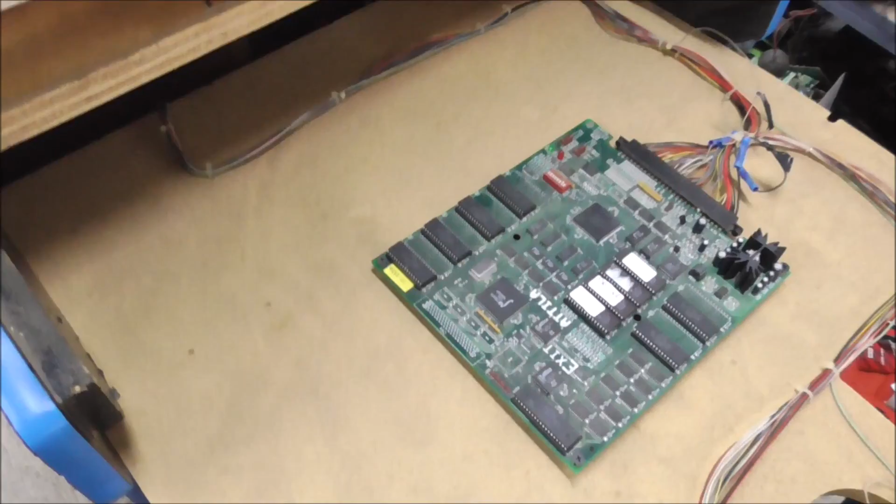We are working on a police trainer arcade game, which sells pretty well for us, and we've got a cabinet here that we're putting everything back together on.

We have the control panel all set up, but we need guns for it - the little Happ 45 light pistols. We did a video in the past where we were fixing a bunch of them, but I still have all these to go. In the other video we did a certain type that had 2 screws, but they made a newer type that had 3 screws at the bottom. So I'm going to try to fix a bunch of those today - pull a bunch of them out and work through them and see if we can get them going.

Okay, so while I'm messing with this, Joey is replacing the tube in the CRT because it's no bueno. I've got a whole box of these, and I'm going to do all the 3 screw ones while we have a game here we can mess with it and test it on.

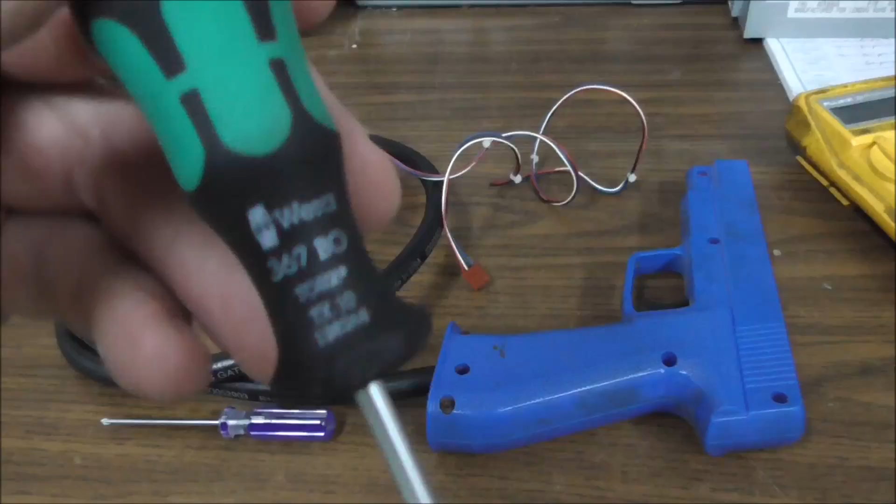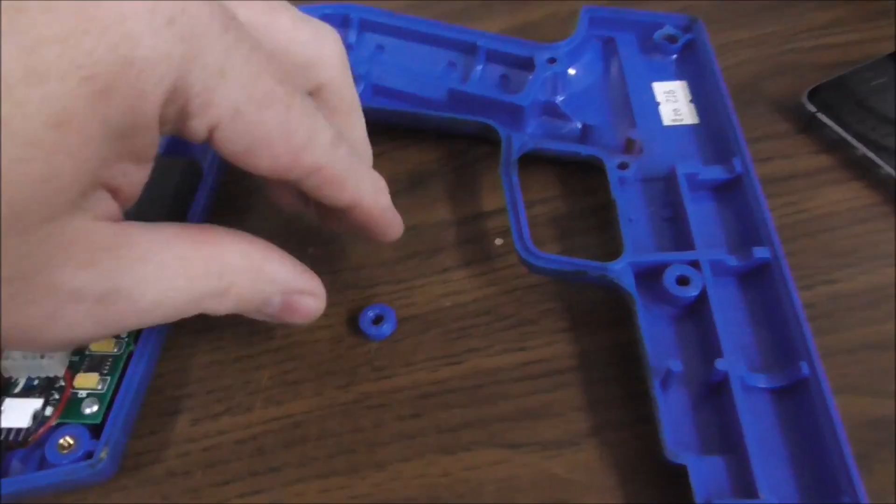Okay, so once we get this one open, one of the problems is this little piece is broken off here, which means you can't use the screw in there anymore. So you no longer have a secure part here, but you still have a screw there - those will hold the gun together. And up at the top you have a little chip, so when it's on the gun there's a chip, but it's in front of the lens, so it doesn't really matter - it's just cosmetic stuff. So I think that one's probably still savable, or at least usable. You can buy new gun halves - I think they're $30 or something for the set. Or if you don't mind the little chip, you can just leave it.

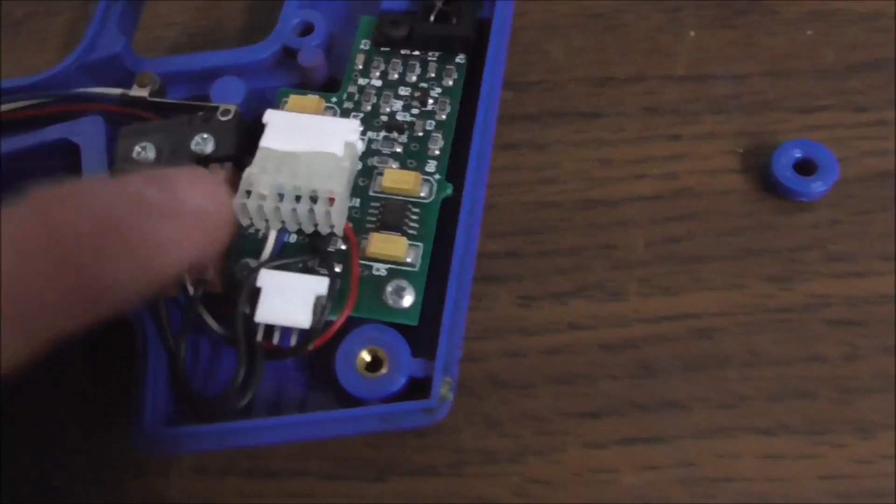So I don't see anything obvious on this one yet. Looks like the connector is still fully seated on there, so that's not going to be the problem, and it doesn't look like the wires are broke or anything. All of these are going to have the newer model gun board, which is a lot harder to fix because there's really not much that can go wrong on it, so it's hard to figure out why it would even be a problem. But it could be that the lens, one of the legs on the photo transistor broke or something - but probably not, because these newer ones had this little bracket. I'll take that board off and we'll look at it and see what we can find out.

Okay, so Joey got far enough on the police trainer that we can use it as a test bench, so we tested it, and we just cleaned up the inside and tested it, and it definitely doesn't work. So I'm going to try just replacing the optic and see if that fixes it.

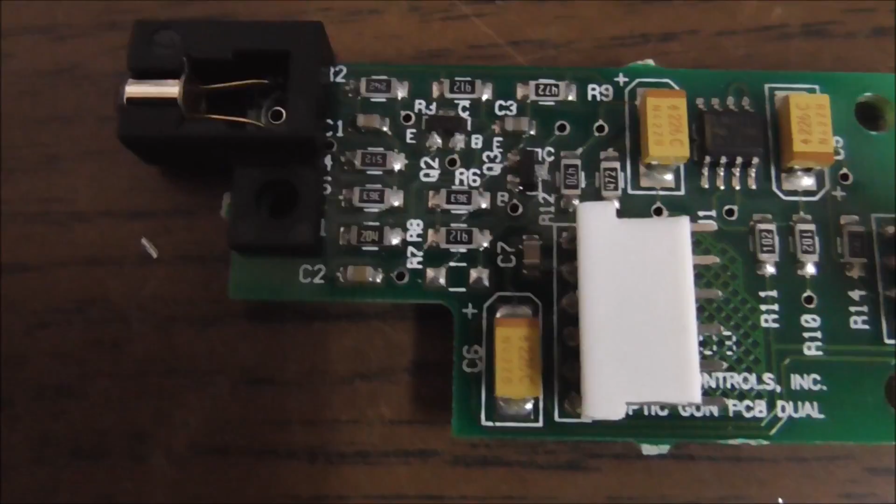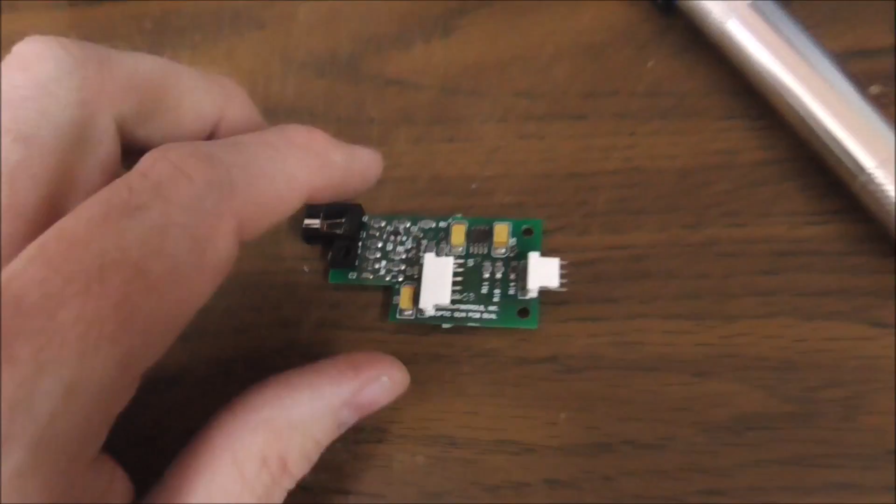Alright, so the optics are L14G1s. Took out the old one, put in the new one. These newer boards, everything's surface mounted, and there's not really that much to go bad, so I'm hoping that it's always the optic. There is a little chip - it's a LM311, I think - and then there's 2 little transistors, but they seem to test fine comparing it to other boards, which, by the way, I have a few other boards, not even the ones in the guns, just the extra ones I've had from over the years. So I'm trying to save $25 every time I fix one of these. So I've swapped the optics - that's all we did. We're going to put it right back in the gun and see if that fixed it.

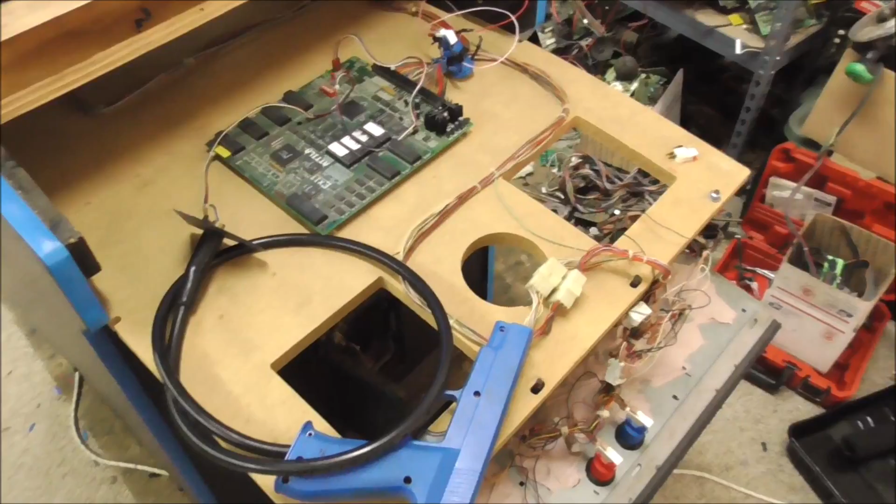Okay, so our monitor still definitely needs work, but it does appear that replacing the optic completely fixed it. Obviously we need to calibrate it. But board number 1 is fixed with the optics. You know what that means? Ka-ching! $25.

So this one, when plugged in, doesn't do anything. Even the trigger doesn't do anything, which is usually a good sign. It usually means the plug's unplugged on the board or a wire's broke. They're all filthy too, by the way, so they obviously need to be cleaned, but that's minor.

I'd rather have one dirty that does work than a clean one that doesn't work. So we'll fix them and then we'll clean them. But...

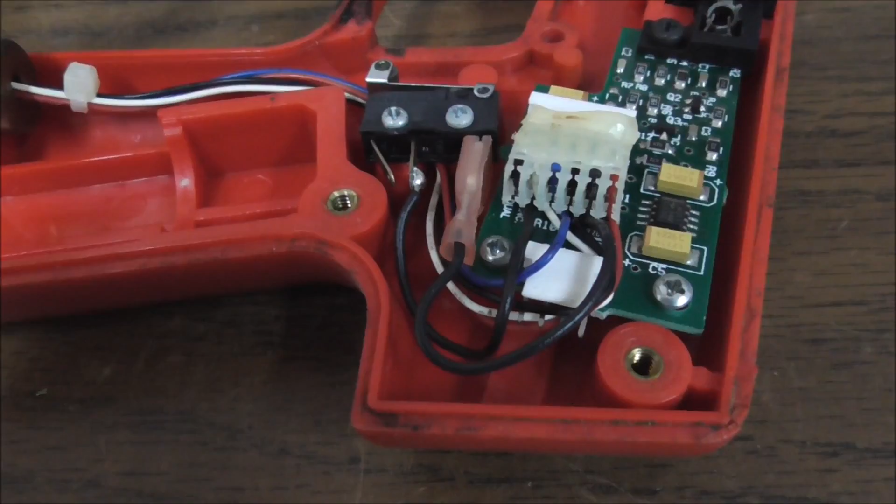I'll bet the plug's just unplugged on this one. Let's see. It appears to be slid apart just enough to make it not work. The ground comes up to this, and then it has to go into the board and come back out another pin to make the ground on this work.

So somebody's been in this one too. You see the solder, and it had a couple screws missing. But yeah, that's an easy one, if that's it. Sometimes the legs on these are broke too. Let's see.

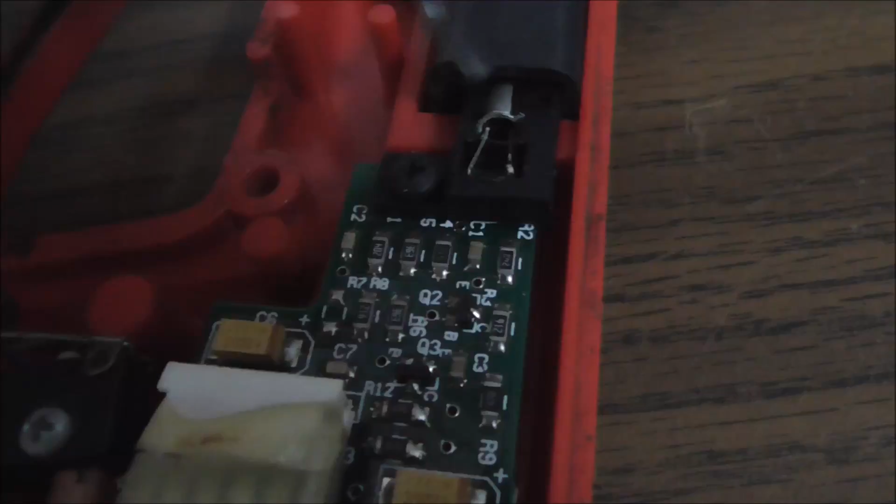Seems all right. Okay, so I'll clean up the lens and the front of the photo transistor, and we'll see if that fixed it.

All right, so that one was just unplugged. I can't aim while I'm holding the camera. All right, on to number 3.

Here's number 3. It has a little bit different look because it's only got 1 screw in the bottom instead of the 3. But I'm thinking it's probably the same, or like a copy of the design, and the cable's out of it, and somebody's taken some of the screws out and stuff. And the trigger's missing. So we'll take it apart and see what we got.

Okay, so we got multiple problems here. So the first thing that happened was the case broke a lot. See that hole? There's no way for a screw to hold it anymore. They're all supposed to look like that, but they've all broken.

This is Happ's recoil gun. That one's broken, and that one's broken. So you can see where there's extra room inside where you can fit the recoil coil, so the gun vibrates when you shoot it.

Bam, bam. Okay, so this side is all screwed up, but this side is still fine. It has the places for the screws still in it. So this side's fine, this side's all broke up.

So once that happened, it slid apart a little bit, and the trigger popped out because the spring was holding it in place.

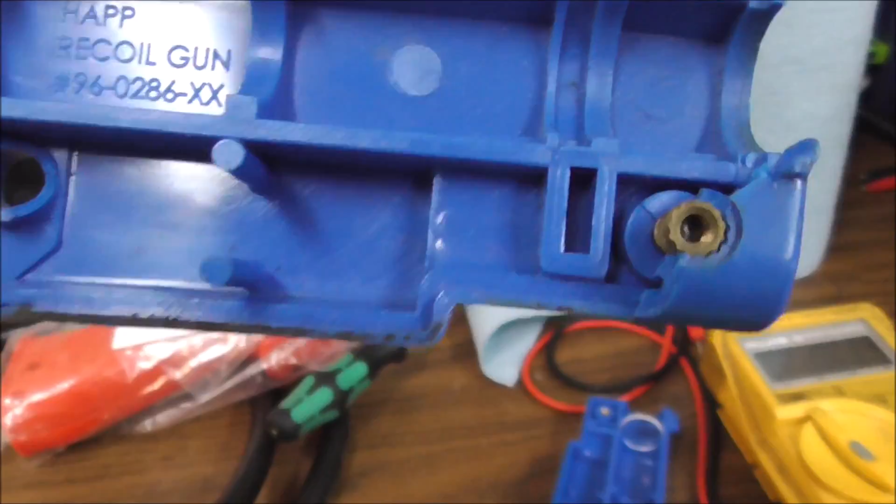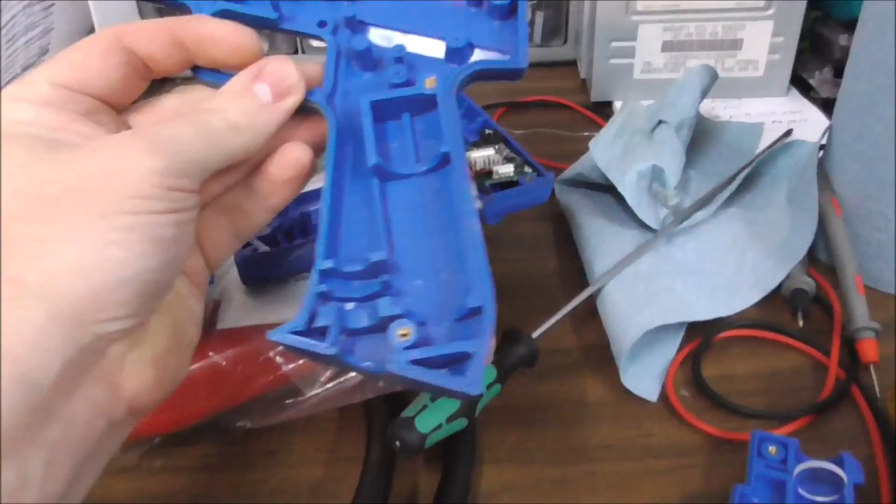This is a different case, and I also found a couple of the right sides here. Like, see, this is the exact same part - the right side survived, the left sides get all screwed up. So it looks like they were kind of in the middle of changing them.

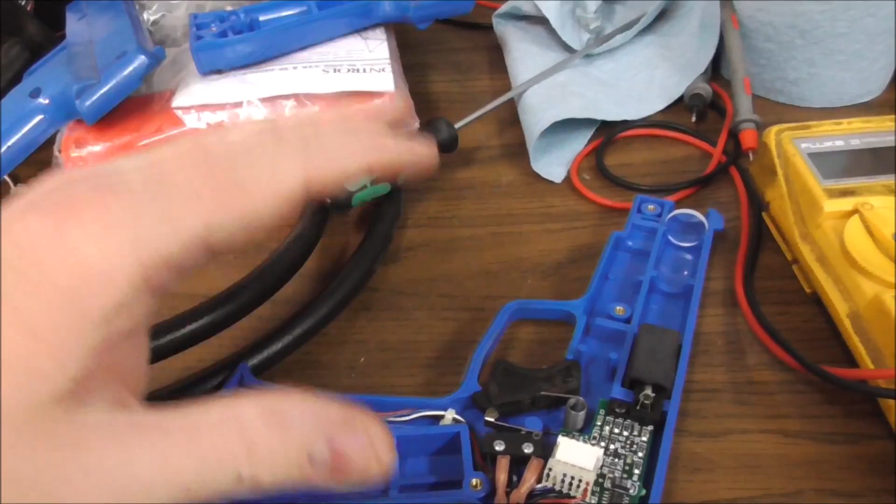So the Model 1s were more like this, where they had 2 screws down here, and they cracked a lot. So they redesigned it and put the screws in like where you don't need a nut on the back - it's actually in the plastic. So the screws tighten up, and they put 1 screw at the bottom.

They changed the way the cord is too. The cord's a little different on the other ones. Just little stuff - like the old one, the cord came up to here, and the new one it comes down to here. Little stuff like that probably changes the way the tension works whenever they get dropped or something pulls on them.

But then it looks like these ones were all problematic, and it caused all kinds of cracking problems. So they redesigned it again, and they made the one that has the 3 screws.

So because I can't find a left side for this, but I've got what looks to be all the working parts of one, I've got this empty case here that I bought somewhere. I think I'll just put this new one on there, and we'll test it, and we should have like a pretty much new gun.

I'll just take all the blue ones, and we'll be done with loose blue ones. I've still got some though that are complete that we can still work with, but I'll put that red case on it and let's test it out.

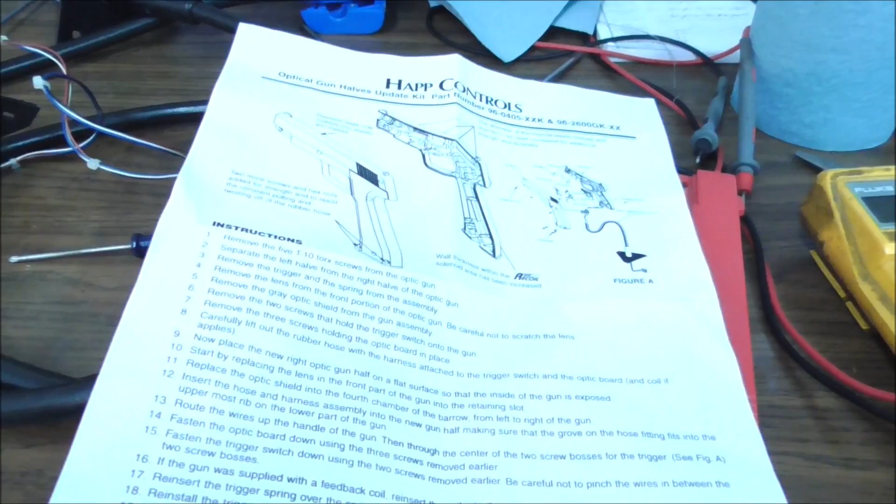Swapped the new case on it, and it came with a little document here that talks about what we were just talking about. Let's look at it.

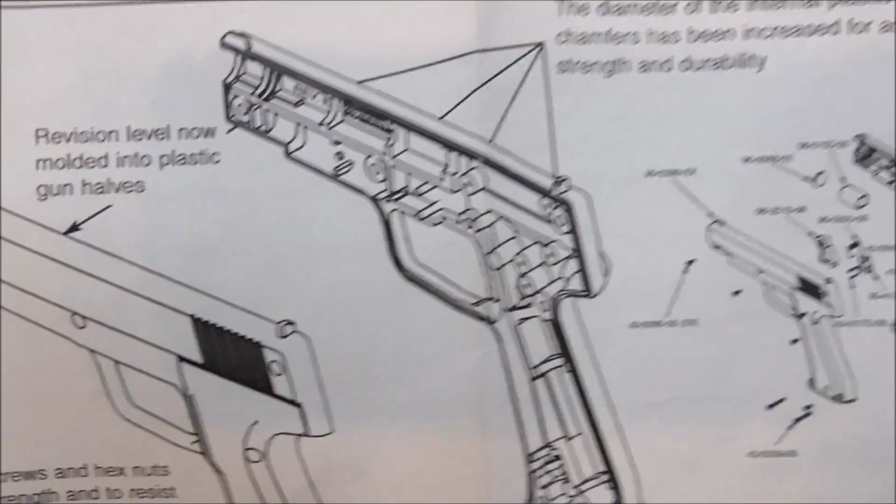Optical gun halves update kit. So it tells you what they changed, which is pretty cool. It says the diameter of the internal plastic bosses and chamfers has been increased for additional strength and durability.

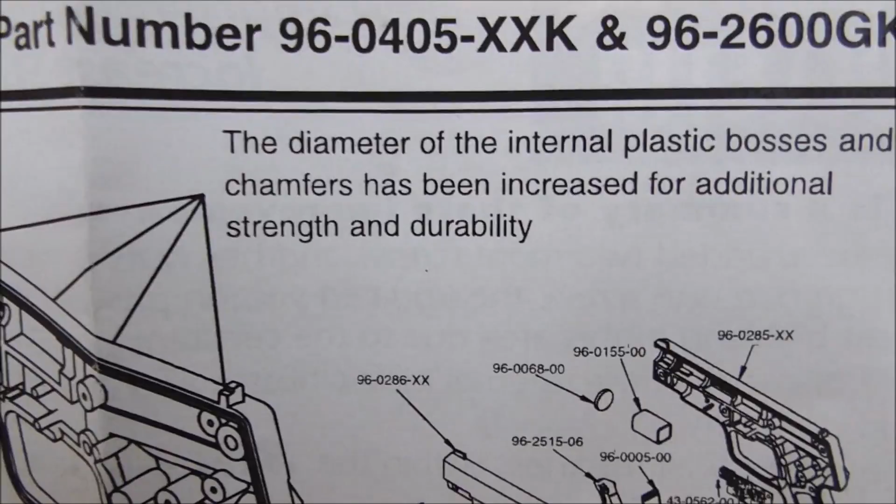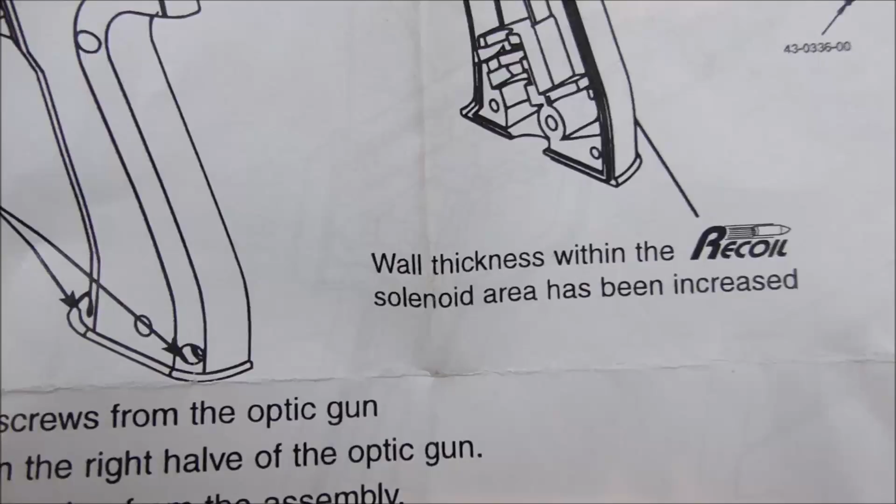So they must have known something's going on there. Wall thickness within the recoil solenoid area has been increased. Must have been a problem there, as parts break down.

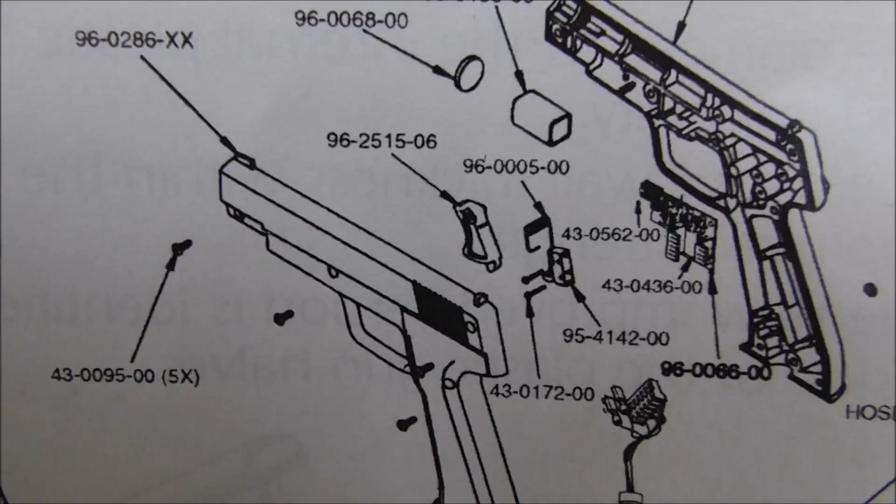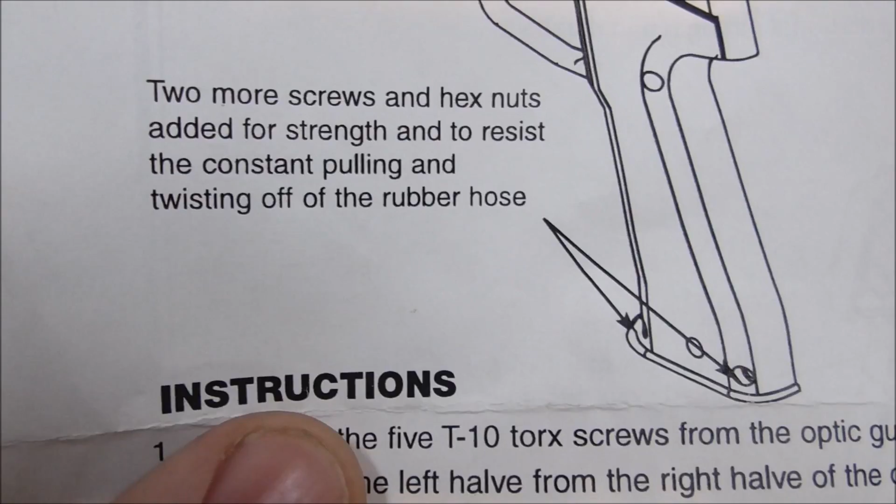It says 2 more screws and hex nuts added for strength and to resist the constant pulling and twisting off of the rubber hose. Revision level now molded into the plastic gun halves. So it says revision E right there.

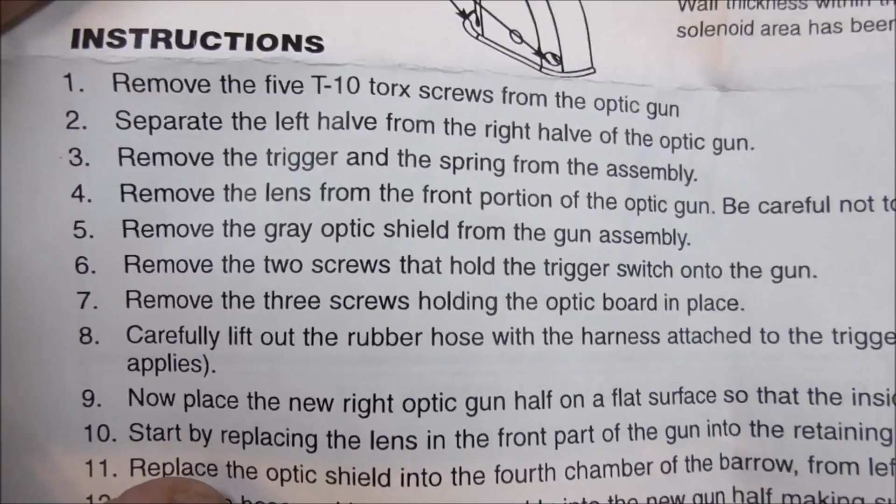Instructions: remove the 5 screws, separate the left half, remove the trigger and the spring, remove the lens from the front portion, be careful not to scratch the lens. Remove the gray optic shield from the gun assembly, remove the 2 screws that hold the trigger switch onto the gun, remove the 3 screws holding the optic board in place, carefully lift out the rubber hose with the harness attached to the trigger switch and the optic board and the recoil if it applies.

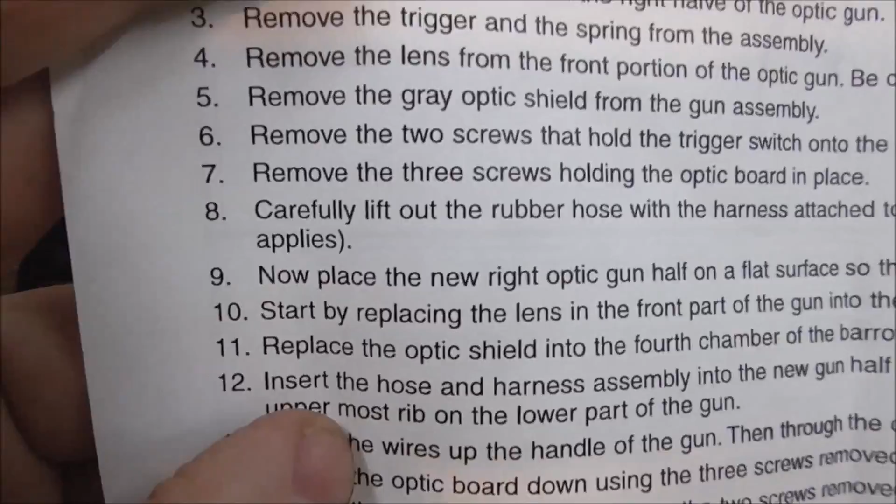Now place the new right optic gun half on a flat surface so the inside of the gun is exposed. Start by replacing the lens in the front part of the gun into the retaining slot. Replace the optic shield into the 4th chamber of the barrel from left to right of the gun.

Boy, that's a great word there. Barrow. I thought it was barrel. Barrow, I guess it's like wheelbarrow. It's a spot to hold something, I guess.

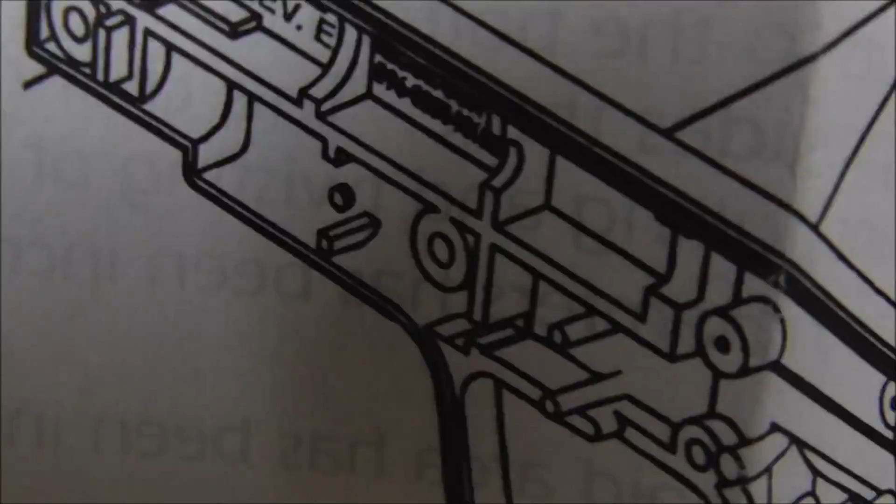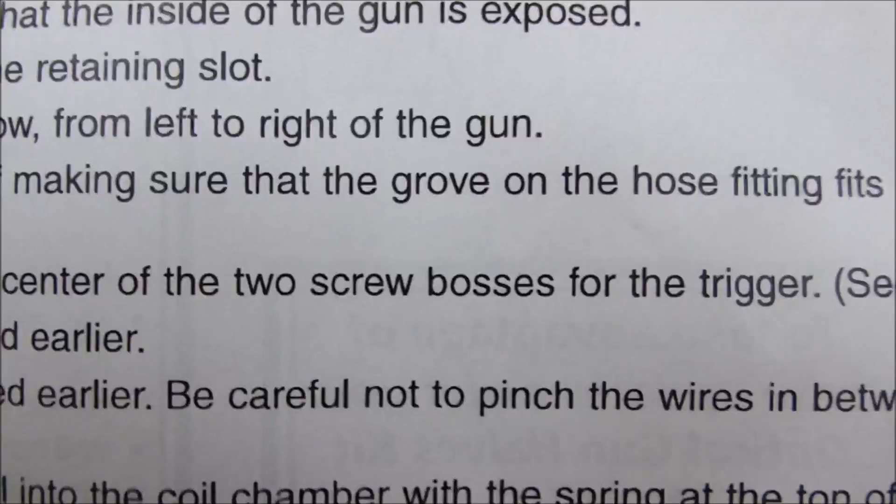Barrow, I like it. Insert the hose and harness assembly into the new gun half, making sure that the grove... Now there are some words that I don't know, but I'm not so sure. I'm thinking that's supposed to be groove. I mean, I know all about groove. I'm an expert on groove, but grove?

I think they might be wrong on that one. Which leads me to believe, are they wrong about barrow? The grove on the hose fitting fits into the uppermost rib on the lower part of the gun.

Route the wires up the handle of the gun, then through the center of the 2 screw bosses for the trigger. Fasten the optic board down using the 3 screws removed earlier. Fasten the trigger switch down using the 2 screws removed earlier. Be careful not to pinch the wires in between the 2 screw bosses.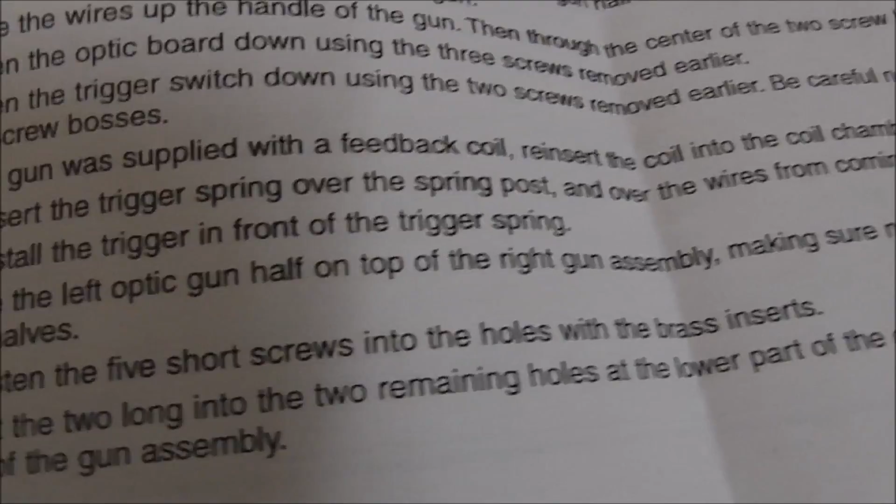If the gun was supplied with a feedback coil, reinsert the coil into the coil chamber with the spring at the top of the coil. Reinsert the trigger spring over the spring post and over the wires coming from the hose assembly.

Ain't no such thing as a damn barrow in this instance. Barrow's bullshit on this one. That meant barrel.

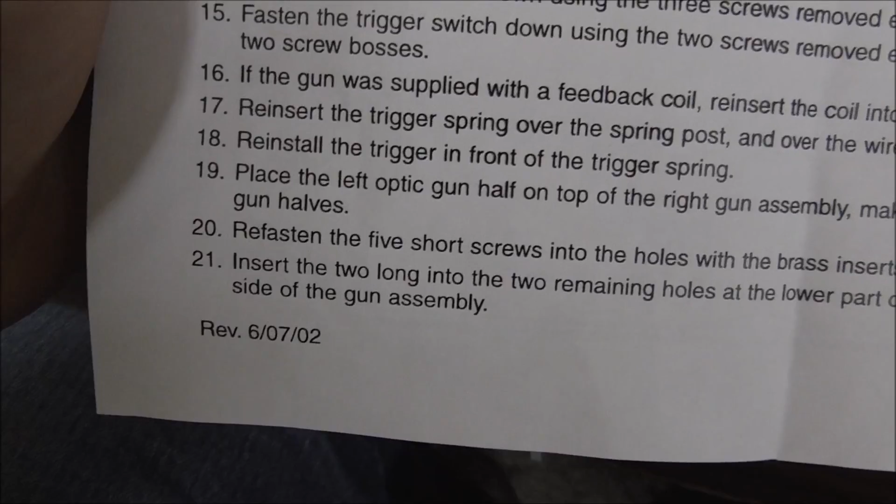Reinstall the trigger in front of the trigger spring. Place the left optic gun half on top of the right gun assembly, making sure not to pinch any wires in between the 2 gun halves. Refasten the 5 short screws into the holes with the brass inserts.

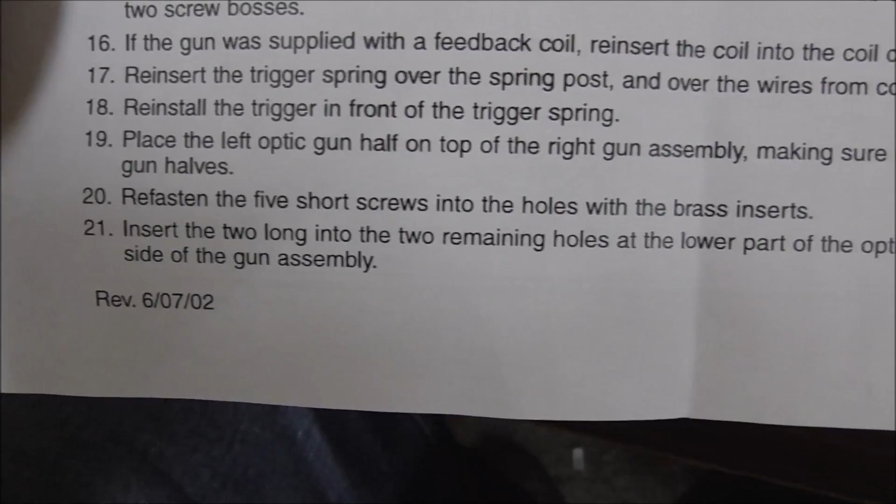Oh, and I thought of what the brass inserts must be called. Studs. I should have known that one. Insert the 2 long into the 2 long.

Definitely barrel. Insert the 2 long screws into the 2 remaining holes at the lower part of the optic gun, then fasten with 2 nuts on the opposite side of the gun assembly.

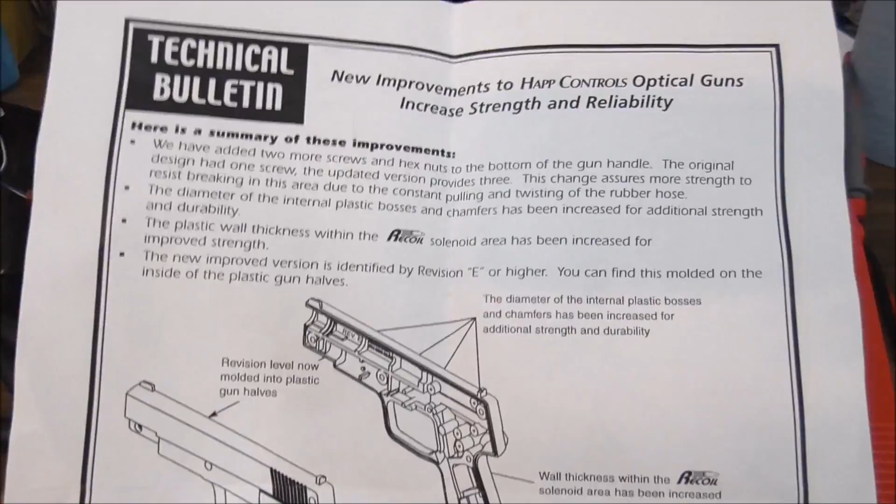Technical bulletin. Here is a summary of these improvements. We have added 2 more screws and hex nuts to the bottom of the gun handle. The original design had 1 screw, the updated version provides 3. Well, the original design had 2. They messed up, people. When they went from 2 to 1, it was a big no-no. They tried to save that screw and it bit them in the ass.

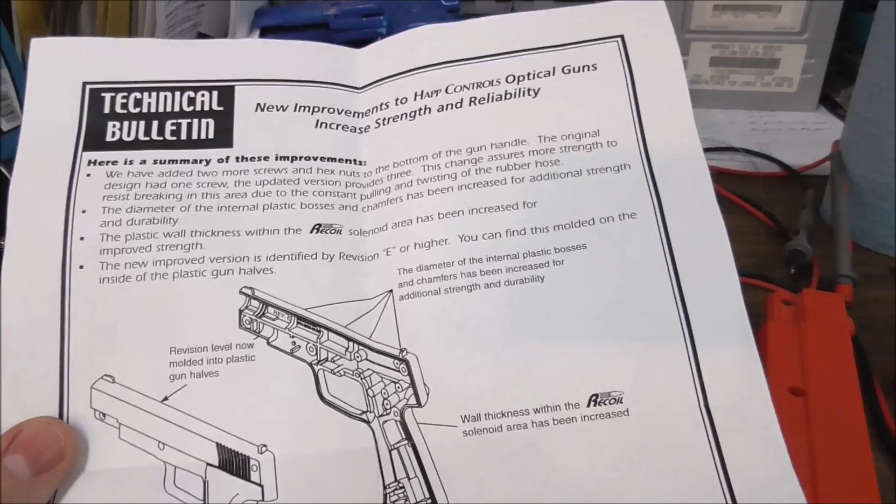The original design had 1 screw, the updated version provides 3. This change assures more strength to resist breaking in this area due to the constant pulling and twisting of the rubber hose, which was going on when there were only 2. They should have known.

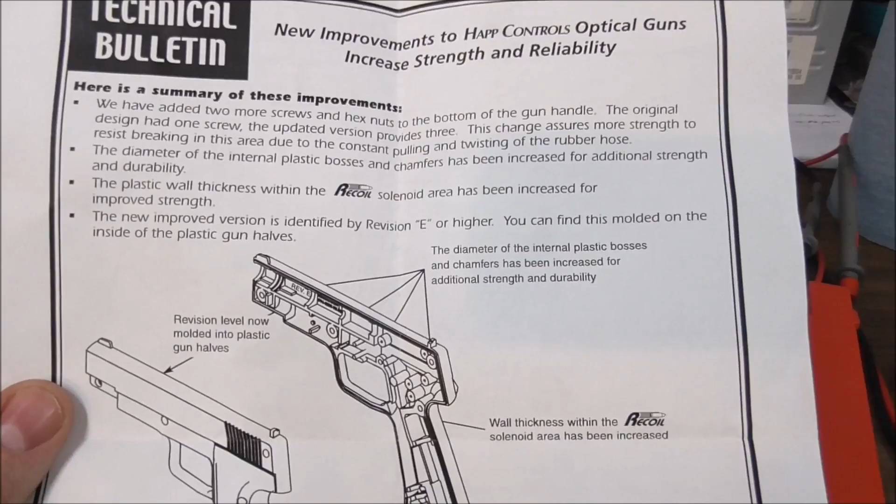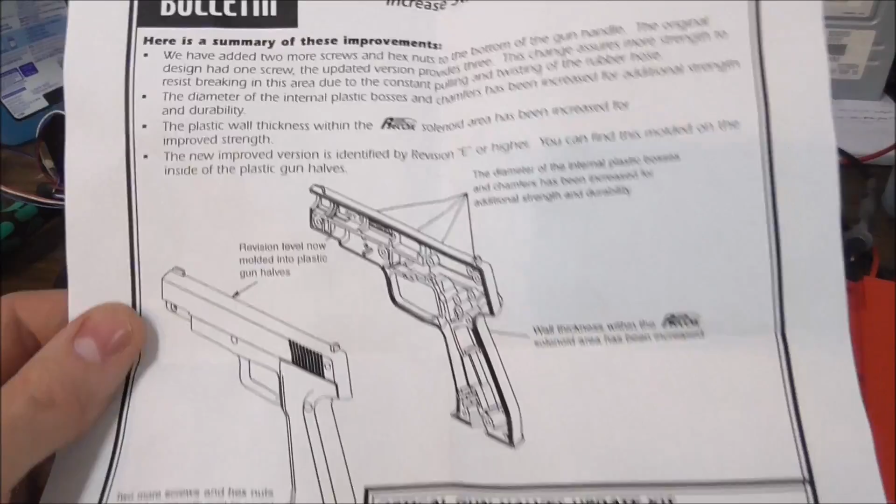The diameter of the internal plastic bosses and chamfers has been increased for additional strength and durability. The plastic wall thickness within the recoil solenoid area has been increased for improved strength. The new improved version is identified by revision E or higher, which you can find molded on the inside of the plastic gun halves. To take advantage of these updates, order your optical gun halves kits now.

And they were $27.90 in 2002. Well, they're about $25 now. I don't know how the price dropped, but it did.

Alright, so that's that. So I'm going to plug this one in and see if gun number 3 works. Yeah. You know what that means? I saved another $25. I'm going to go ahead and count it.

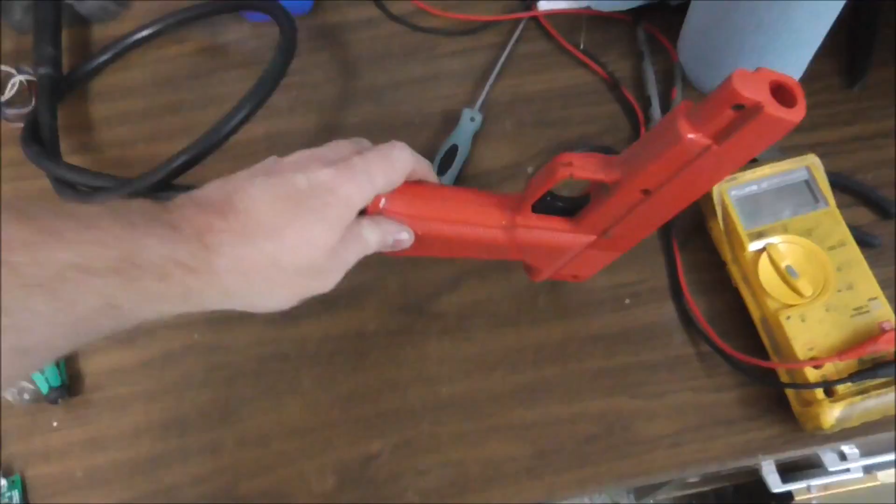Number 4 was in our broke box, but works just fine. So that definitely counts.

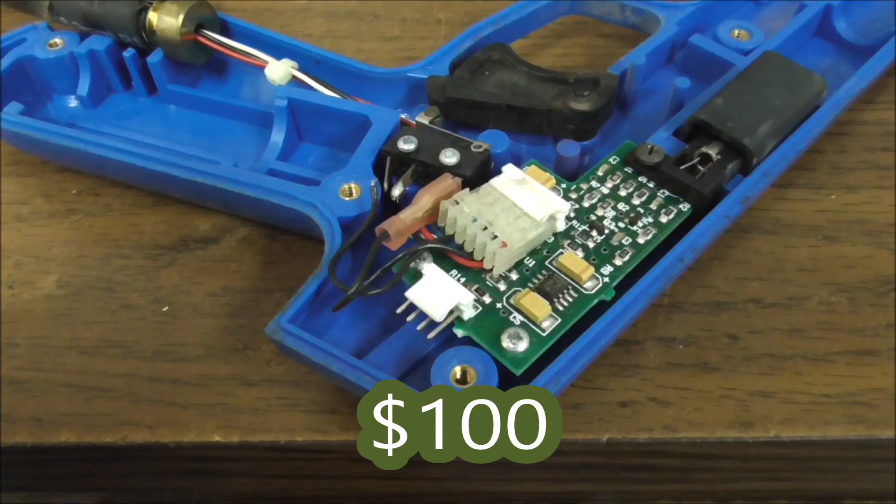Gun number 5 wasn't doing anything, so I thought it would be the plug. The plug is not messed up, but the trigger wire is broke off. So if you can't pull the trigger, you can't hit anything. I'm going to solder that back onto the pin. You could put a little connector, but I don't have any that are that small, actually. I'm going to solder it back on like they had it, do a little better job, hopefully, than they did, so it'll last longer. Hell, it may have lasted 10 years, I don't know. But solder it on really good, and then we'll try it.

I think this is 5, isn't it? Everything's cool. Very nice. Alright, on to the next one.

So those were the last of the Type 2s that I had that were in good condition. I've got a bunch that are cracked up and stuff that need new cases, so I figured I'd go through and fix some of the boards. Maybe I can fix or test the one in this one, and then use it to test some of these. Look at all these. Oh, we got to get some of them back together. I hate having them just sitting around that don't work.

Right? So I'm filming this video. I'm going to take this one apart, see what's going on with it, see if we can test it. And we'll just use this cracked up gun as our test bed for some of these other boards.

So the inside of this one looks fine. These are all sold to us as broken, tested not working. But it could just be that they threw this one in because the case is broken in half. So we'll test it out.

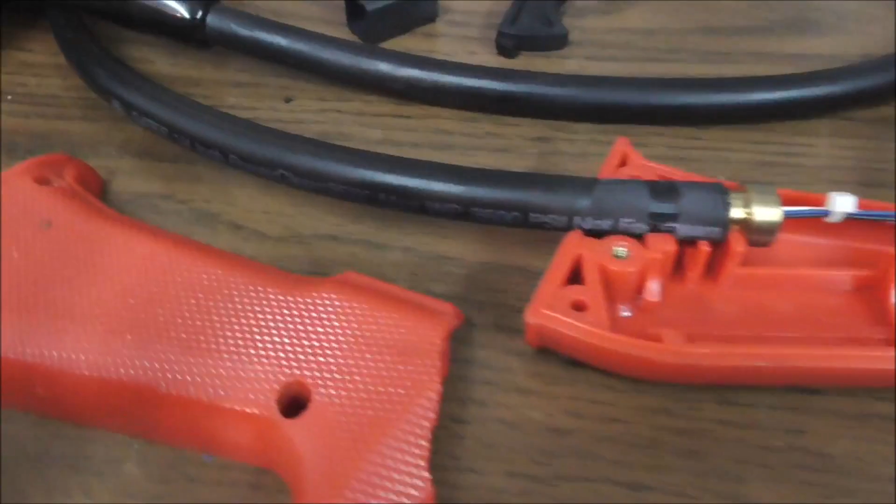Another thing I wanted to show you, just kind of interesting - the hose that they use on these is just an off-the-shelf part. Gates 1/4 inch, Power Clean 3500, Max WP 3500 PSI, but it's not for steam.

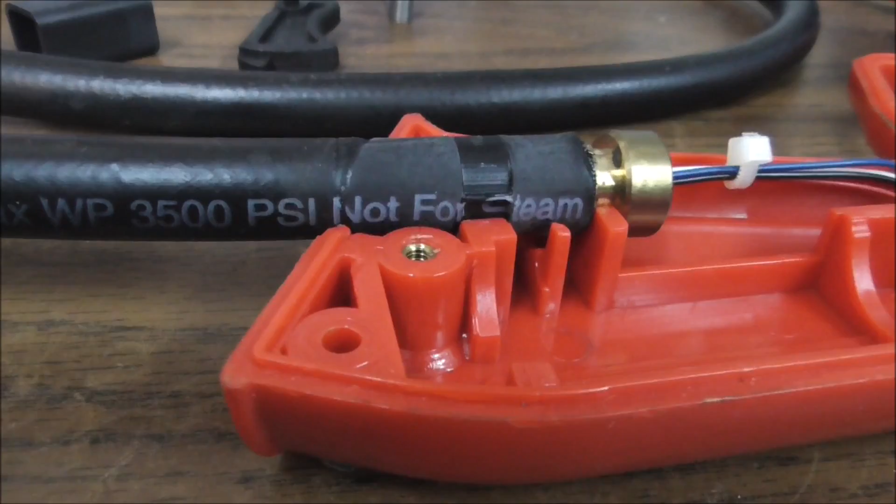I picked the wrong one, but you can see that the gun works. All right, so that's board number 6 that works. So we're doing good here.

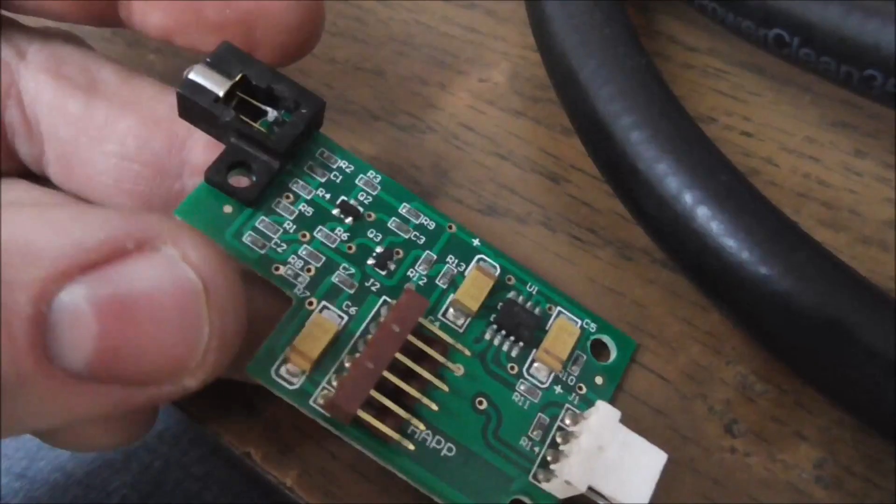So this is candidate 7. If you look really close, right where the leg goes into the body of the optic, you see how the optic's moving, but the leg isn't? So the leg broke off. I'm going to very carefully replace that optic with a new one, and that should fix that one.

Adjusted the monitor a little bit. This is number 7. Let's see what we got here.

All right, that's board number 7. We got that one off the counter, so that's good. It's been laying around for who knows how long.

That's the optic that was broke off number 7. As you can see, the leg broke off right flush with the thing, so there's really no way to fix it. But board number 8, if you look really close, it's broke right where it bends on the top one. But there's plenty of leg there, so I should be able to solder that back on. So I'm going to dab a little bit of solder on it, and then we'll see if that fixes it.

Look how beautiful. Look how gorgeous. I didn't even burn any of the plastic. Look at that. Wow. Man. Might have made $25 with just a little teeny dab of solder.

Holy moly, I just noticed, as I'm putting it back in, this is a parts board. Look, it's had everything taken off of it. The caps are missing, which we would replace, but that surface mount chip's gone, and I don't like messing with those. So I did fix the optic, but I think I'll take it off and try it on one of these other ones.

Like maybe this one. What do you think about that one? Let's try it on this one. Okay, this is the new board 8. Not like that other board 8.

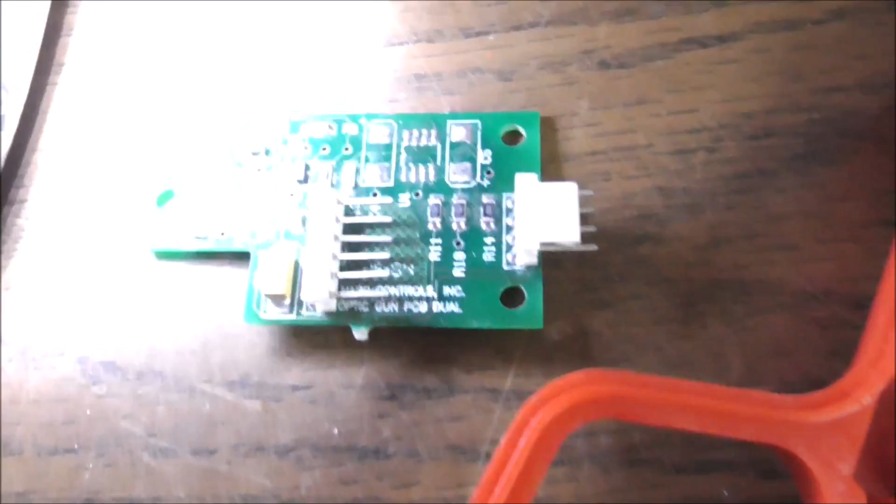Alright, so I tried this one and it didn't work, but now that I look at it, this is another one that someone has tried to part out. If you look, R11 is missing and C1 is missing, so I'm going to pull them off of that one that's largely been parted out, because both of them are still there, so we'll pop them on there and we'll try it again.

Okay, so I put the cap and the resistor that we're missing back on the board, and I got this one. All right, so that's 8.

Board 9 was just in the bag of broken ones, but it doesn't look like anything's wrong with it. And then board 10, same thing. So maybe they got mixed in. We're gonna test both of those out and see if there's anything wrong with them. Okay, so 9 and 10 worked fine.

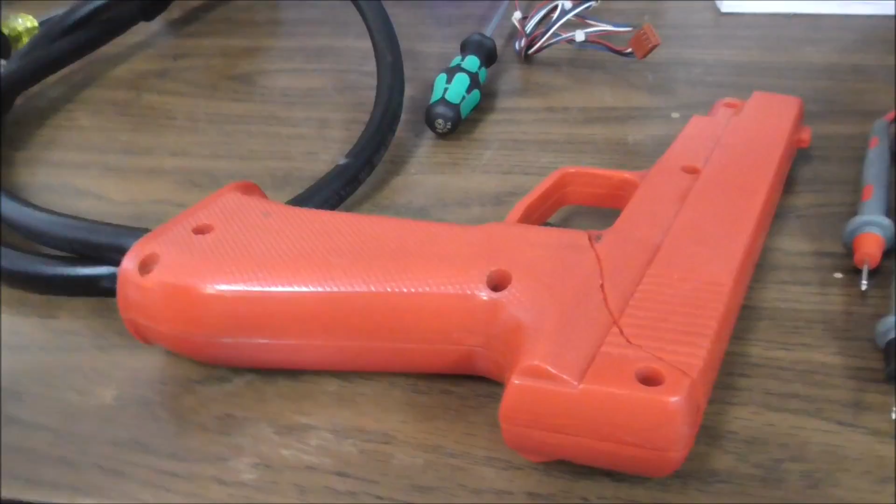Still needs to be calibrated. All right, folks, that's all of them that I had. Number 12 worked fine, so we tested 12 boards. Some of them just worked fine, and all of the ones that were messed up, all they really needed was the optic.

If it's the Type 2 board, it's vastly superior to the Type 1, I would say. But the Type 1s, depending on the casing you have, will still work good. So I got like a whole box of them now. This should last me like forever.

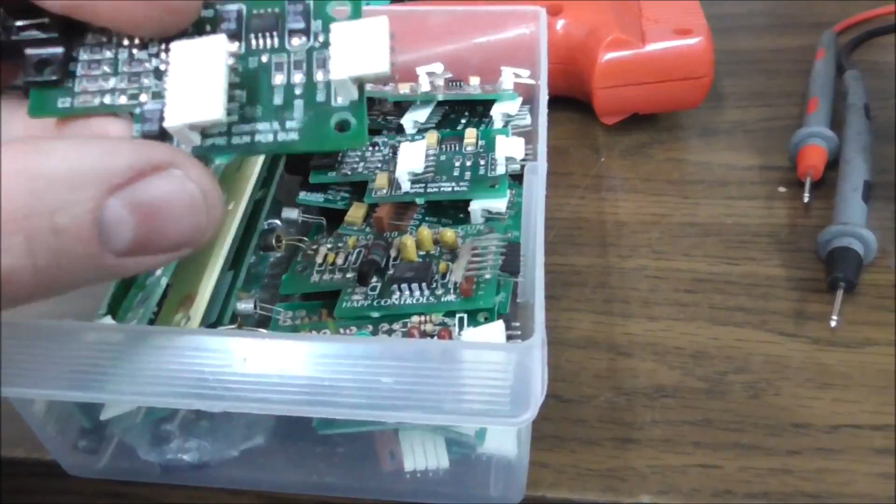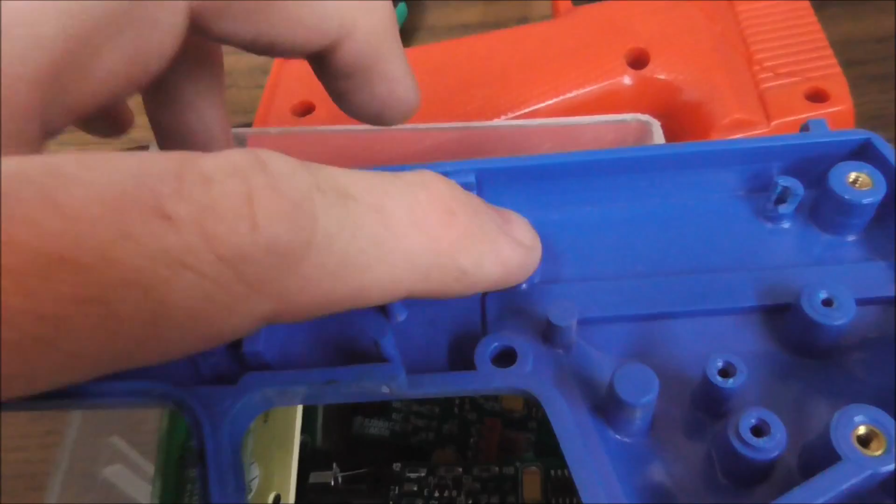So the main difference is... I have to test that one again. The main difference is this little holder here. In the actual case, it has a space for that. See how there's like a square hole there? That's for that holder, because the main problem with the Type 1s was that optic would always get broke. On the Type 1s, they were held in place like that. So that's the main difference inside.

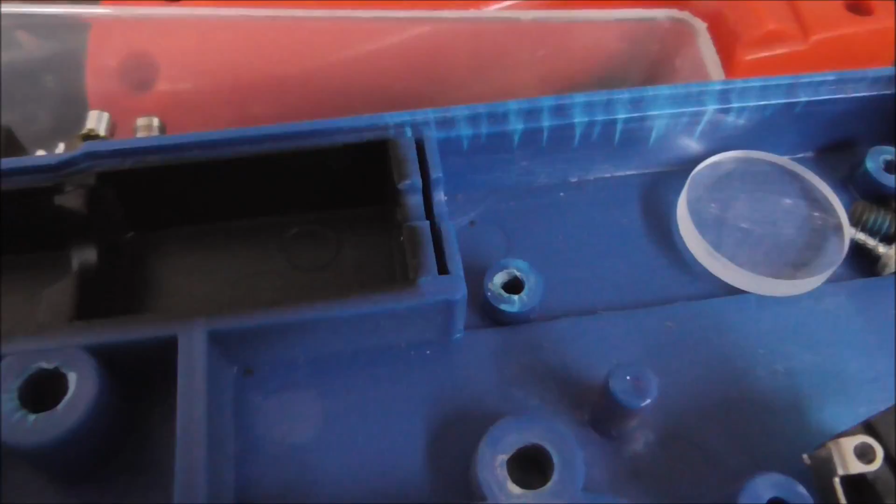There's other little minor differences. Good Lord, I got the dropsies. But check that out. Look at that. Boy, we're looking good now.

If I can just keep from breaking them. So I'm gonna fix up some more. I've got some more Type 1s that are the complete guns. I'm trying to just go through and fix all of them that I have, so that whenever we get in a gun game that needs some work, we can either just swap a gun onto it or swap a board in. It's no problem.

But I had that whole bag, you may have saw in the first video that we did of these. I had that whole bag of these boards broken, and I hated it because I knew they were worth, to buy a new one, it's like $25, which isn't that big of a deal. But just by going through the stuff I already had, even the ones that, we save some money. Don't have to order new ones, so we save some money, period.